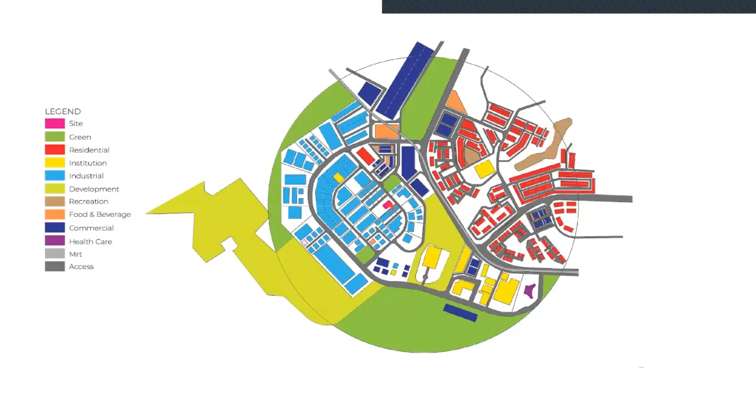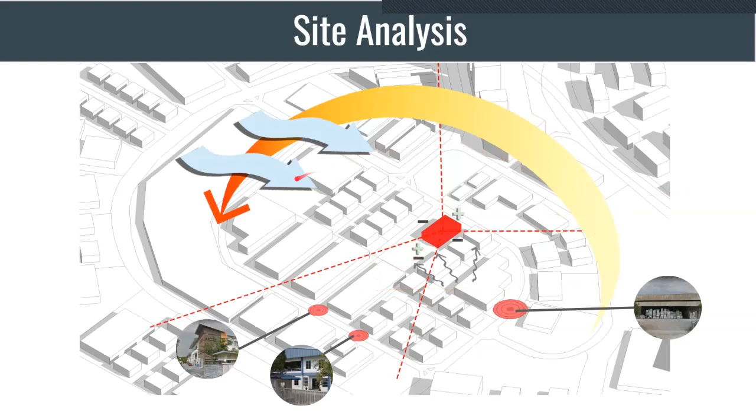As you can see here, the site is surrounded by industrial area. The facade faces north so that the sun is mostly directed on the side of the building. Currently, the office is used as storage because the warehouse is currently full.

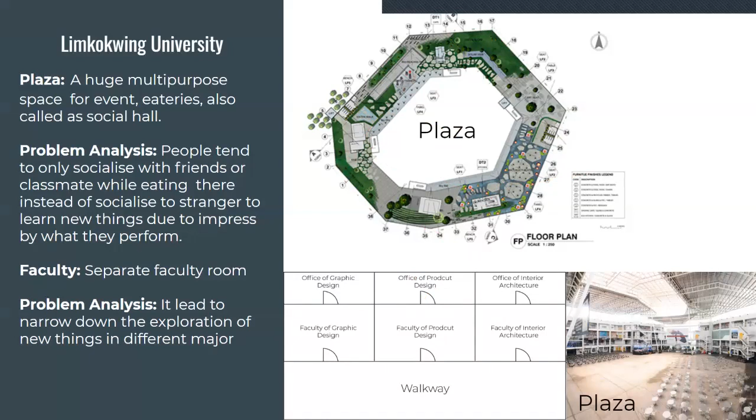What is a training facility supposed to be? In the study of Limkokwing University, the plaza is a hall for multipurpose activities and also an eatery. But people tend to socialize with friends there without any intention to ask strangers about what information they saw, which is what they do back in class. For example, their faculties are all separated instead of being open to all majors. If it were open, people could gain inspiration and ideas to apply to their own major—for example, a product design student could get ideas for making a presentation board from a graphic design student.

For the class program, executives have briefing, theory and soft skills, while kitchen crew, factory crew and visitor trainees have practical skills programs for practice in pastry, culinary and barista. Classroom is used to brief rules and regulations, and theory class and soft skills only for staff.

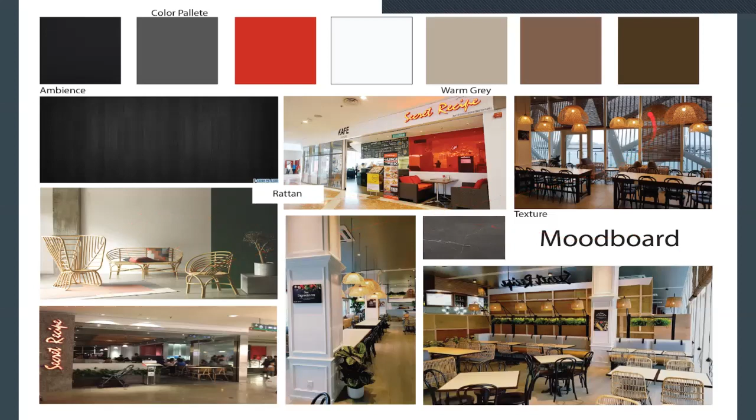A few color palettes have been selected for the interior. I retain the identity of Secret Recipe by using rattan furniture and rattan lighting with a vibrant interior combining modern and contemporary styles.

For the first, ground floor plan, focusing on the reception counter. From the study of Silver Chef Academy, I learned that the reception counter has to be the first space seen when entering the building, for user-friendliness, especially for guests or visitors.

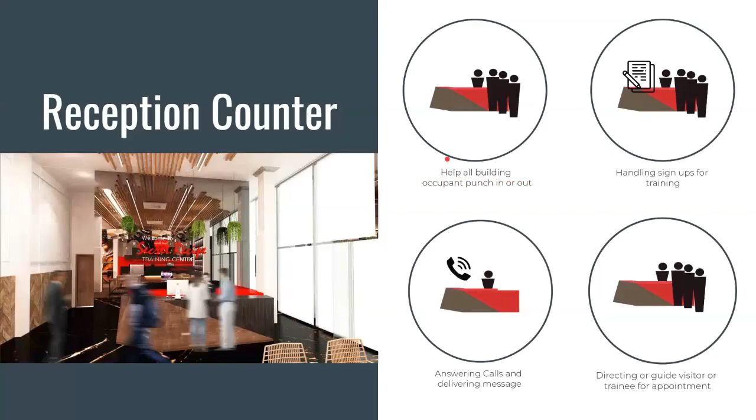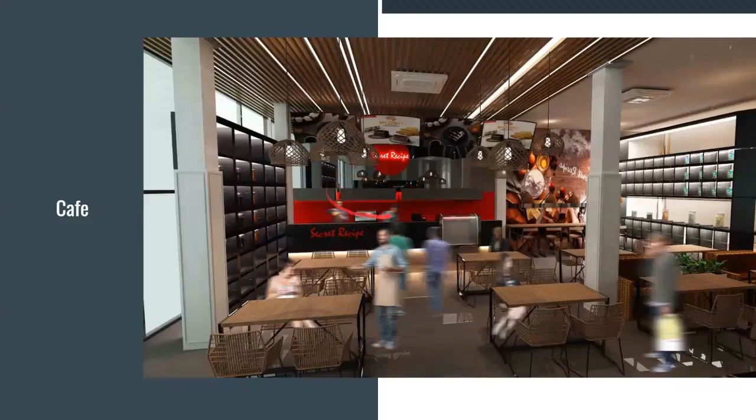The second space focuses on the cafe, which will be opposite the reception counter. This is also a space for training and practice for barista trainees, with enough coffee machines for 4 baristas, including trainees, as planned.

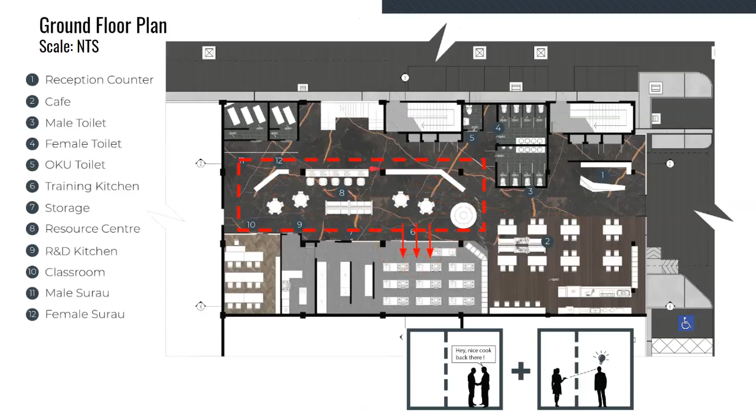Focusing on the resource center, from the problem studies, trainees can track performance through an open training kitchen to get inspired and for learning purposes, as they can see everything from the resource center. There are also computers for online resources, and everyone can socialize and share knowledge there.

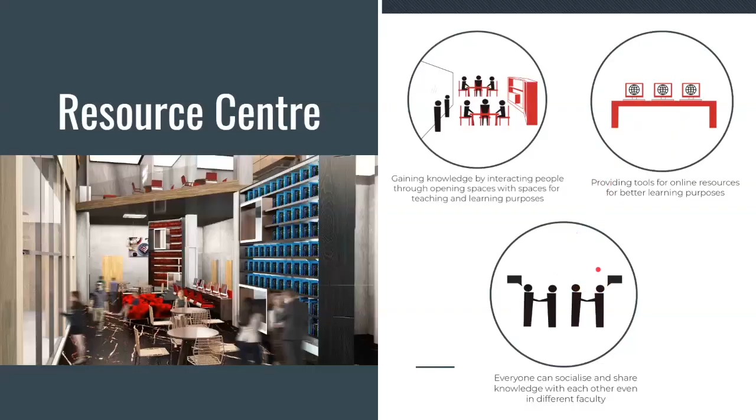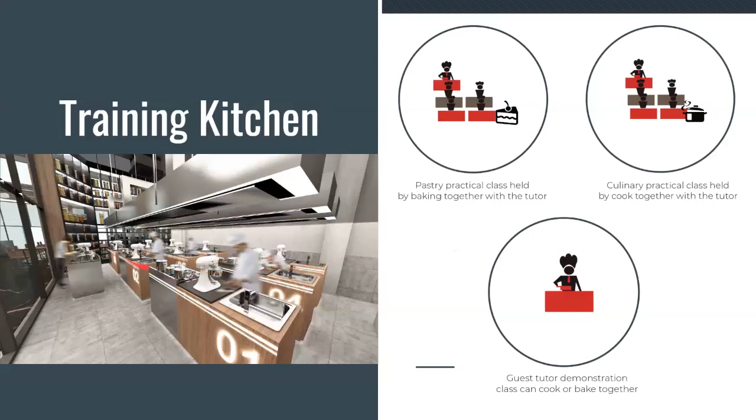For the kitchen, it will be used by pastry and culinary practical classes, where everyone faces the tutor while cooking together. Sometimes guest tutors are invited to show or teach there.

This is the training kitchen island with standard height, prepared for one trainee each, managing their own island, to train them to take responsibility for their own island.

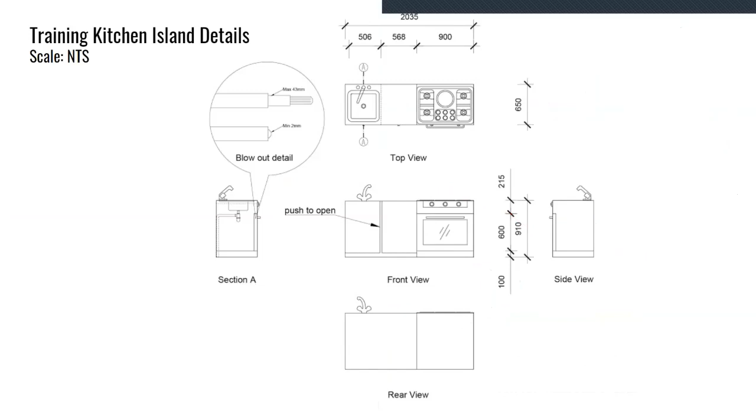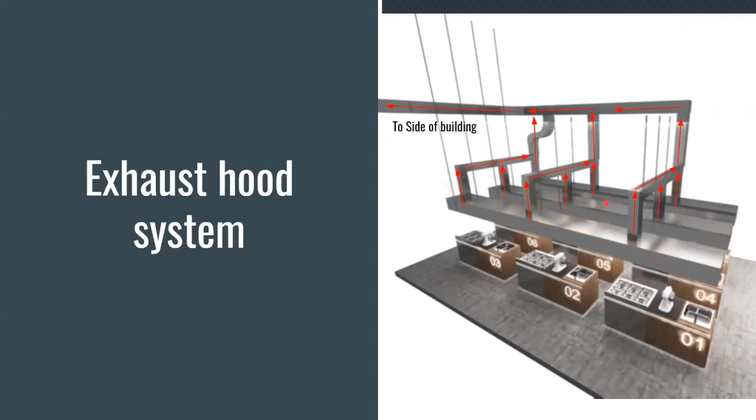For the exhaust pipe, it starts from a small pipe, then to a sub pipe, and then goes to the main pipe. From the main pipe it goes to the side of the building.

Smells cannot pass through the orange labeled areas that are fully protected, while smells can partially pass through the cabinet partition. Most smoke and oil are still controlled by the semi-enclosure and exhaust hood system.

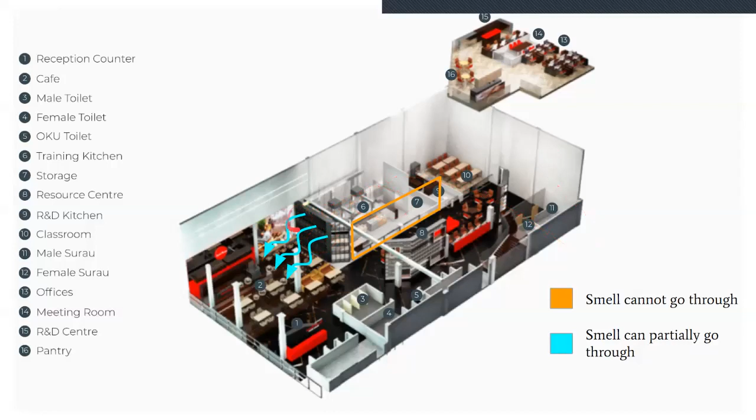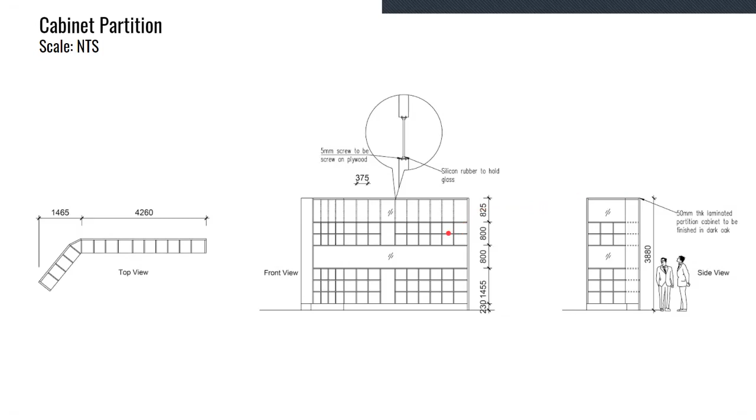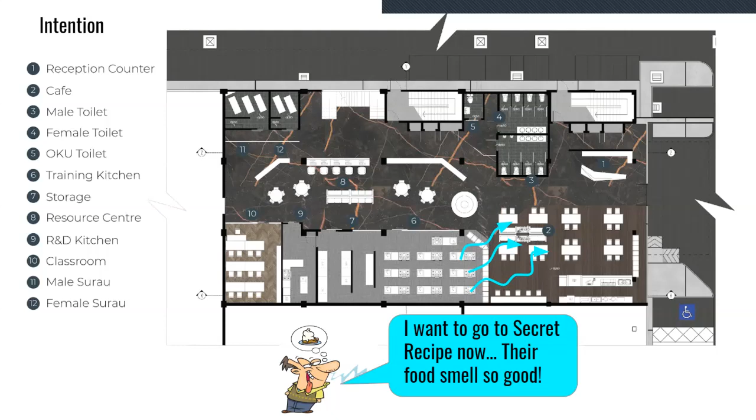It is partially enclosed by glass and partially open, visually and physically, because the smell can help promote Secret Recipe food to anyone who smells it, increasing future customers. For the R&D kitchen, storage is shared between the training kitchen and R&D kitchen.

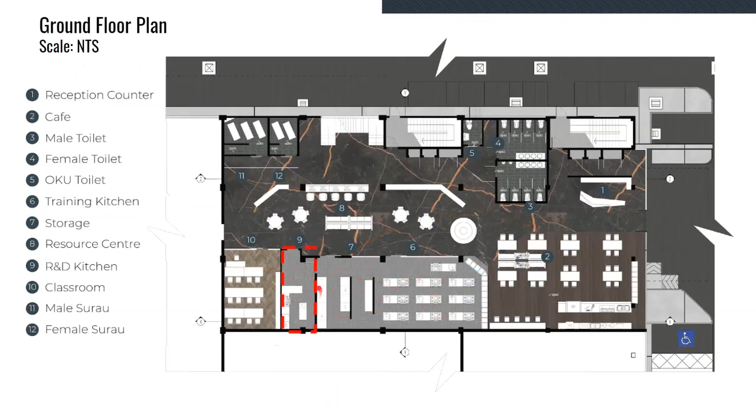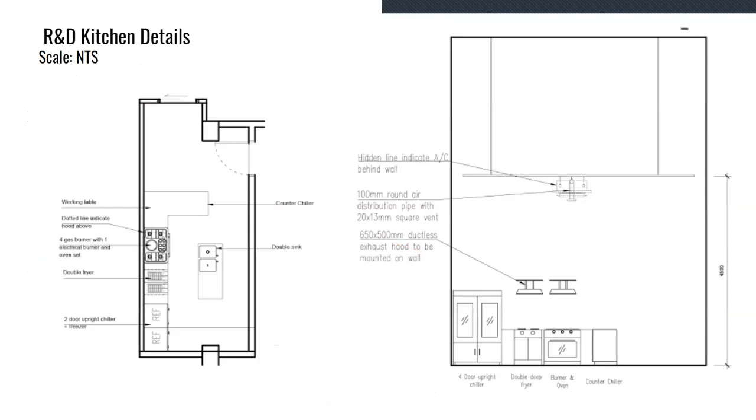Here is the R&D kitchen, for R&D staff to test new products, a private space provided with kitchen tools including pastry and culinary equipment, as well as 2 exhaust hood systems.

For the mezzanine floor, both the office and R&D center are separated by a meeting room as a partition in the middle, setting both spaces as equally important. Pantry is shared by both departments as well.

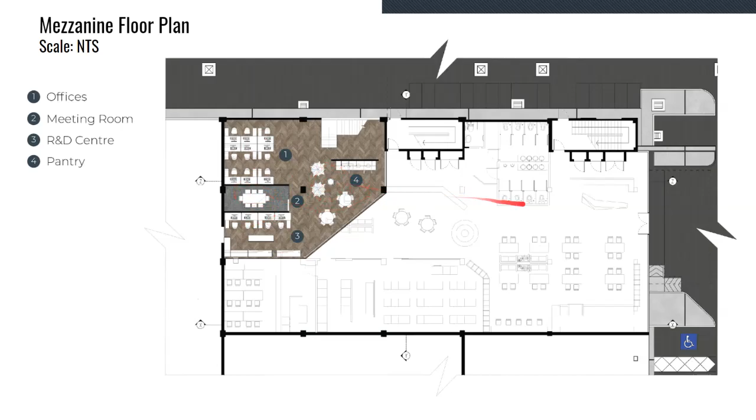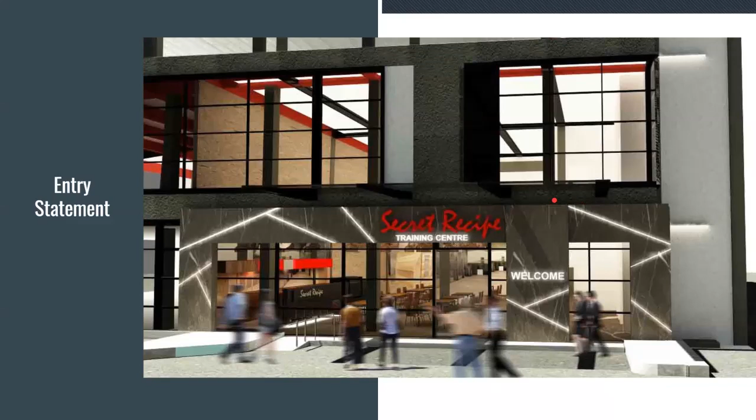This is the exterior view of the training center, designed as a feature of Secret Recipe entrance similar to any outlet we see outside. It is also designed to match the profile of the building in shape and color.

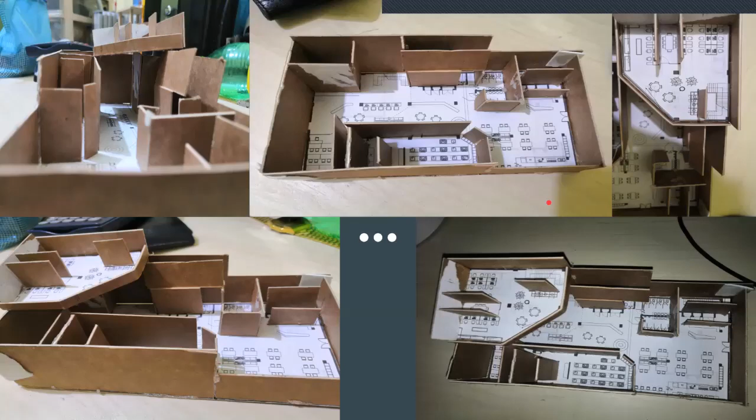The model is used as a study visual to show the wall volume and building profile. As we can see, the wall in the front is lower, while the wall in the back is higher, at 4,500, for example, in the section.